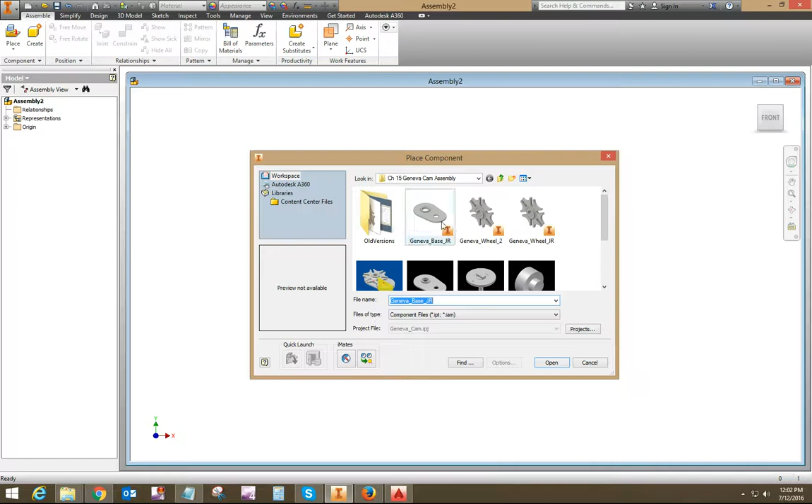Okay, now we're going to work on the Geneva Cam Assembly. So we're going to start a new English standard assembly file. And we want to bring in our base. And place it. And you definitely want to place grounded at origin. It did two of them again to me.

Anyway, okay, so when you created this from the AutoCAD drawing, if you did it on the XY axis plane so that you're looking like this now, you need to go back and edit that sketch to redefine it to get it so that it lays flat so that that is your top view, or else your assembly is going to be all wonky. Okay, so this is what we need to have.

I need to check that. I may not have made that tall enough. It just looks kind of short. Yeah, I'm going to fix that right here, and I will edit the note. I did it 0.625 from the bottom.

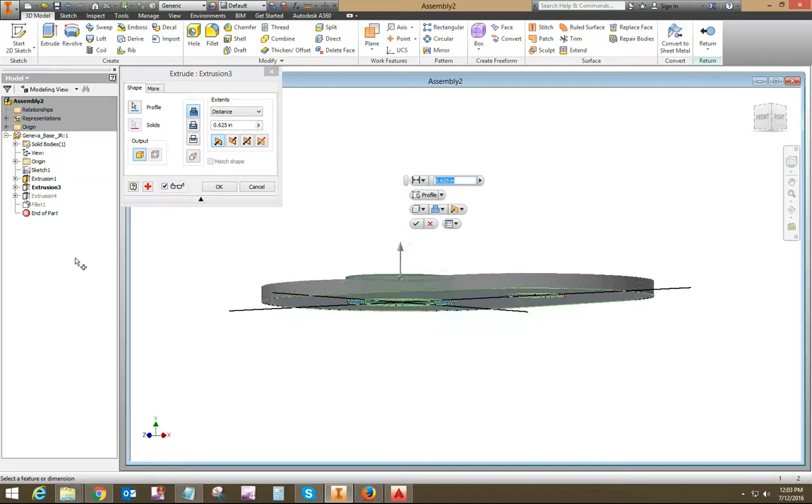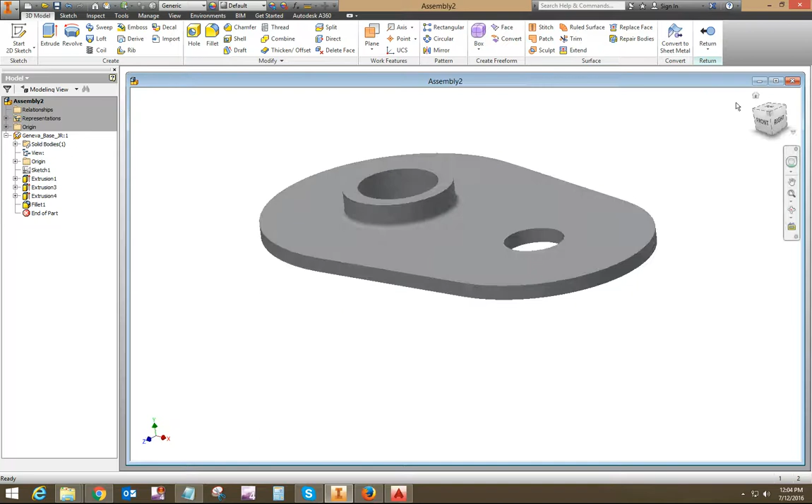So that should be 1 inch tall. Okay, that's how it should look. I'll edit the AutoCAD note, so you may or may not see that. Okay, so that's how it should look right there. Okay, so we got that first part in. Return. It's grounded. Now I want to bring in the actual Geneva Cam, or the wheel, and I'm going to drop it right here.

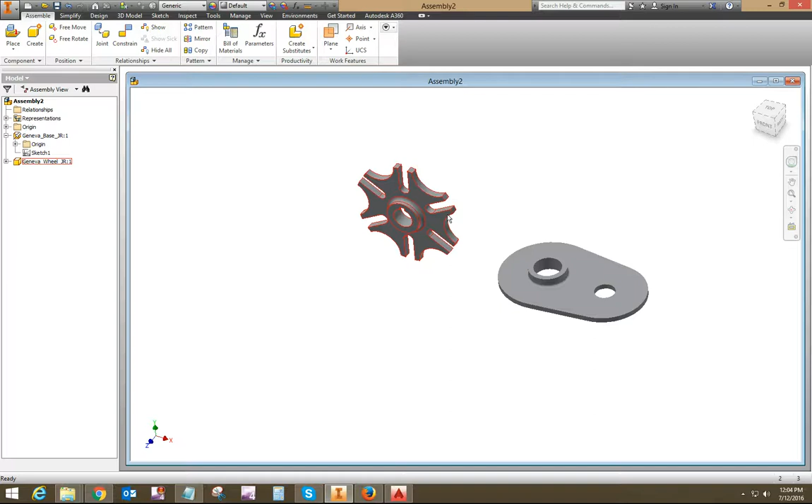Okay. Now to put these two together, we're going to use a joint. I don't know if you've done this yet or not, but we're going to use a joint command. And so if you want, hover over it, press F1 to read more about joints. But it's a way of assembling things with multiple constraints at one time. So if you hit here, you're going to see your different choices. If you know what you're doing, then you can choose the one that you want. But we're going to start with automatic.

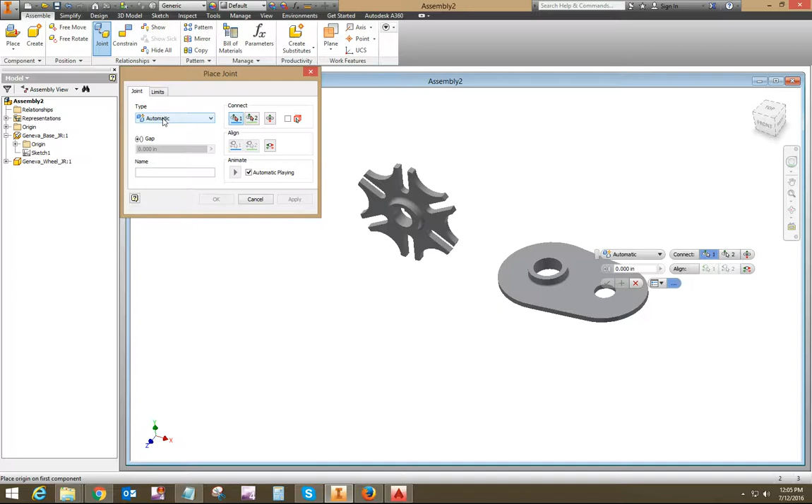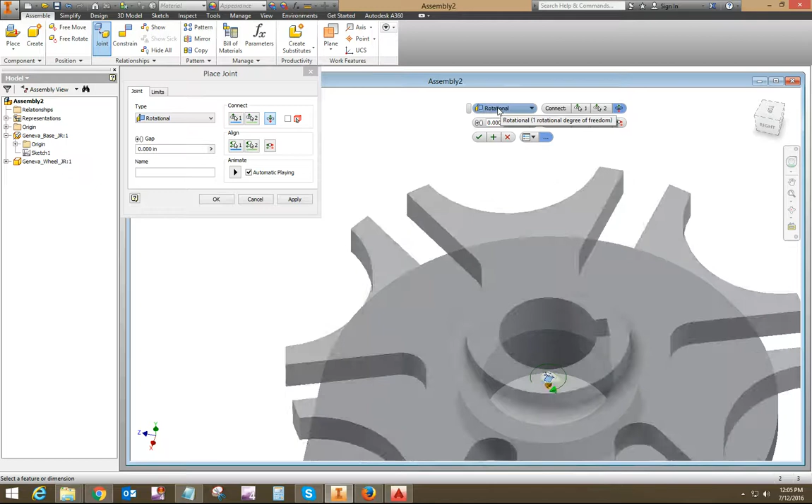Okay, and I want to kind of zoom around. I want to get to the back side of my wheel and choose that arc. Okay, and now I want to go to my base, and on the top surface choose that arc. Okay, and so it tells me it's going to use a rotational constraint. And you need to kind of look at it. If it's flipped up or down or something like that, then you can change directions here. Okay, but it should be okay if you chose those surfaces. And so we'll say okay.

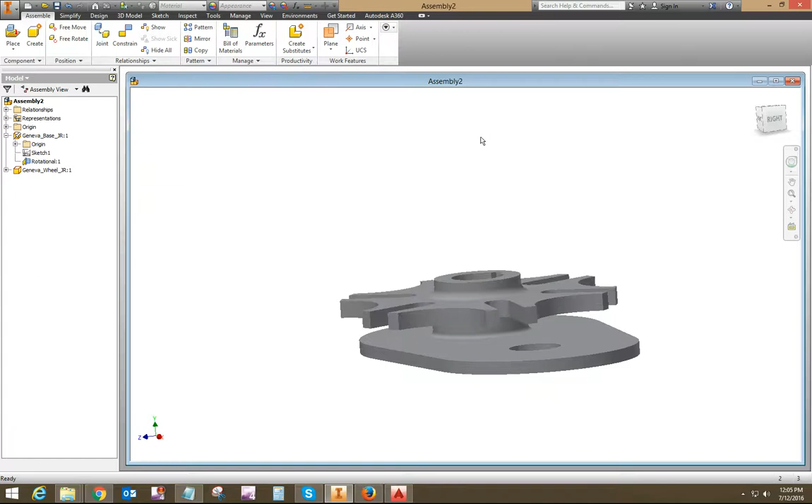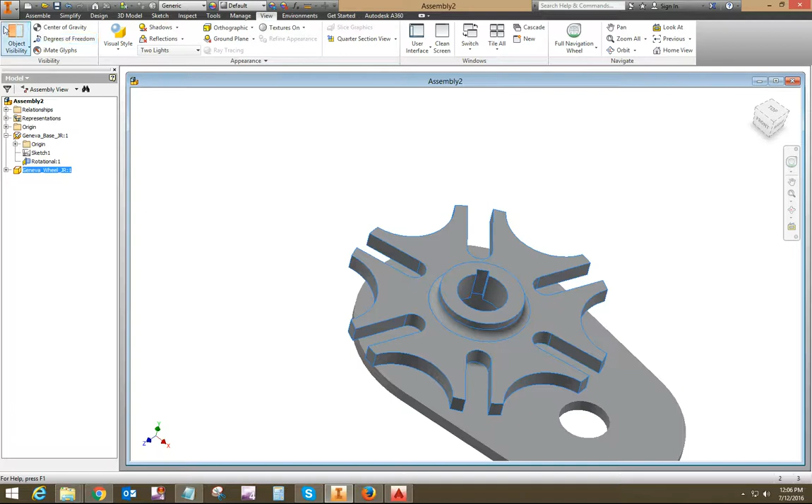All right, and so now it's there. I can wheel it around if we want. Let's check our degrees of freedom, and it shows me rotational is all that it has. Okay, now we want to bring in the driver. And I'm going to drop it right there. And I'm going to do the same thing, a rotational joint into this hole.

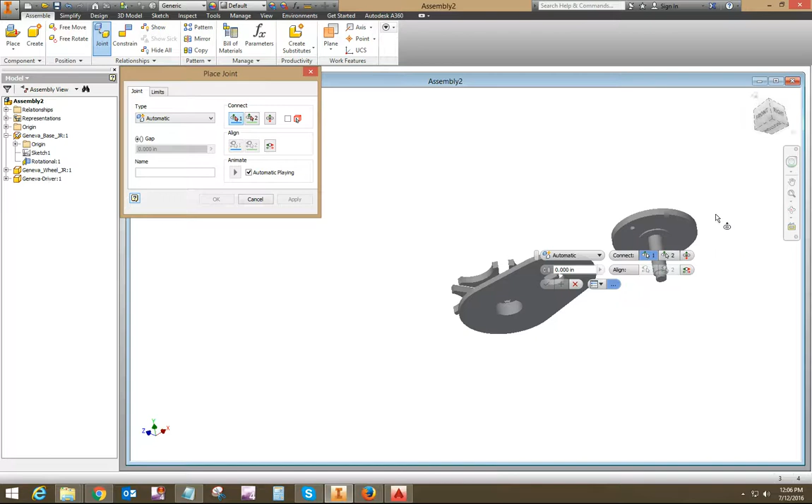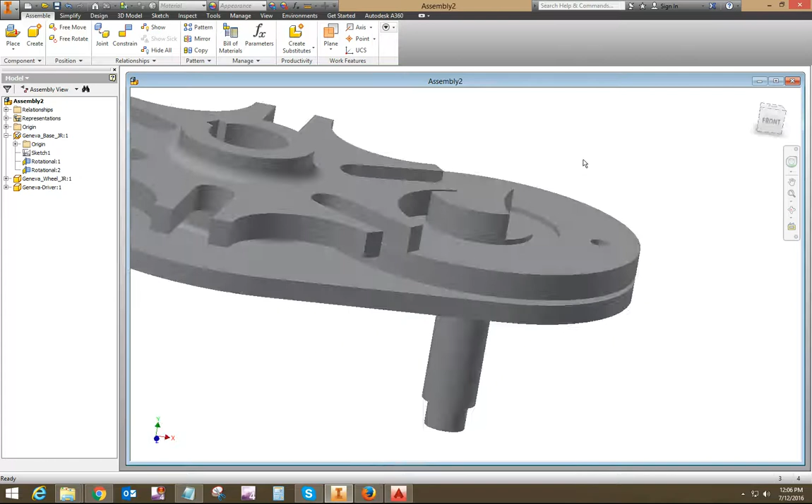Okay, so I'm going to go joint, automatic. I'm going to choose that circle and that circle. Rotational. Come back here and look at it. Looks good. It's not recessed down. It's not sitting down inside there, so that's good. All right, and now I can spin that around. Okay. All right, so don't worry, we're going to get to fixing all of this stuff, okay?

Now we want to put in the pin. Checking my notes, just a minute. All right, so let's bring the pin. Going to drop it right here. And we're going to insert it in the hole, but we're going to use a rigid joint because we don't want it to rotate and spin and such as that. Okay.

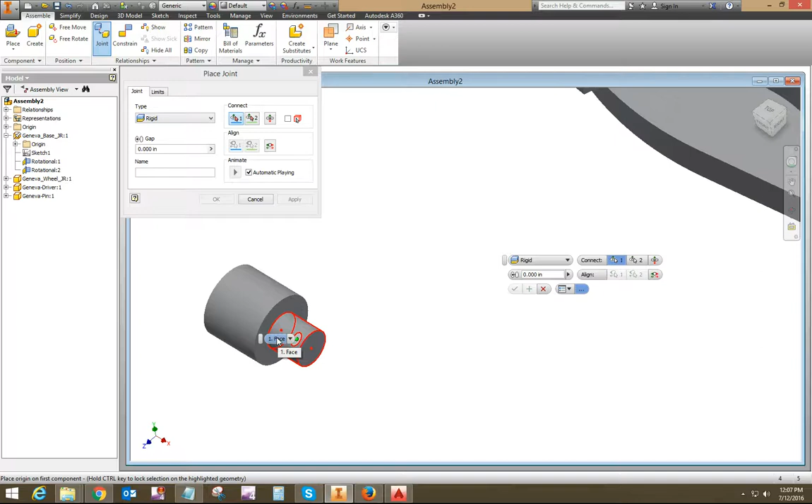So let's come down. Let's try it with the cylinder and the hole. That's kind of backwards. So let's flip that. That looks better. Okay. We don't need a gap in it.

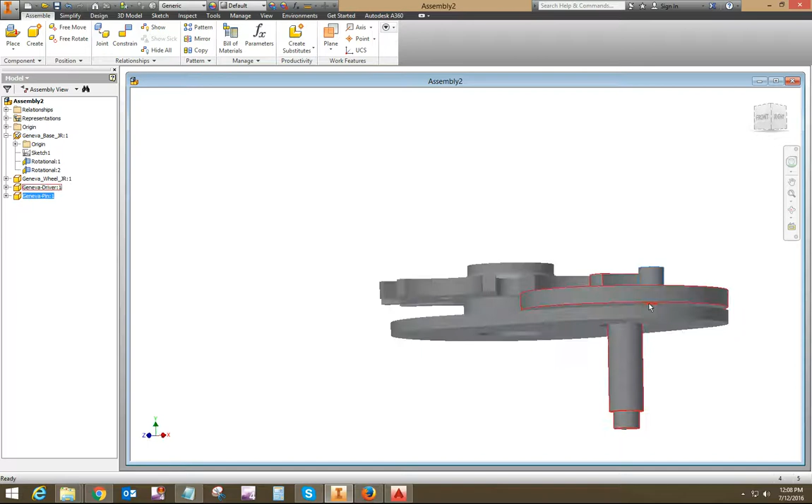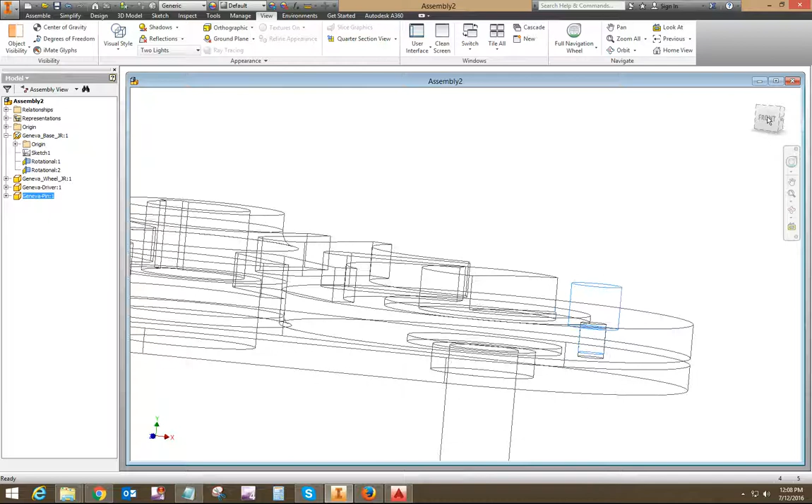I'm guessing that looks okay. So let's take a look at our degrees of freedom for that. We got a little block, so that's rigid. It's not going anywhere. Let's check our wireframe view. It is down too low though. We see that, so we've got to edit that.

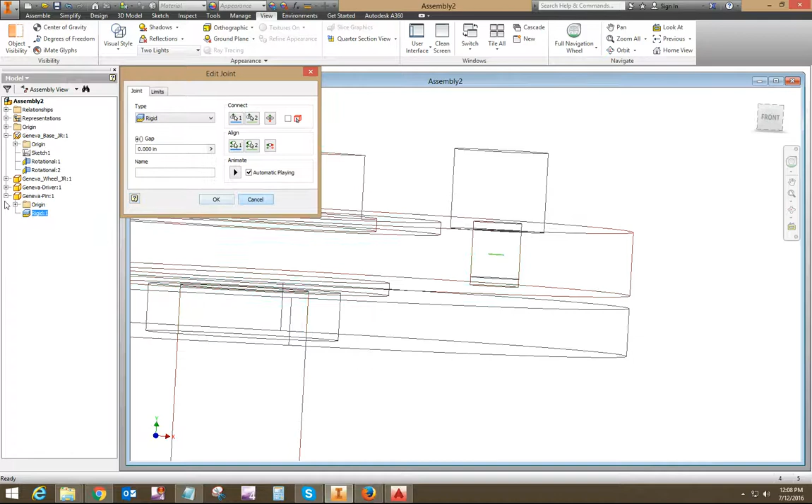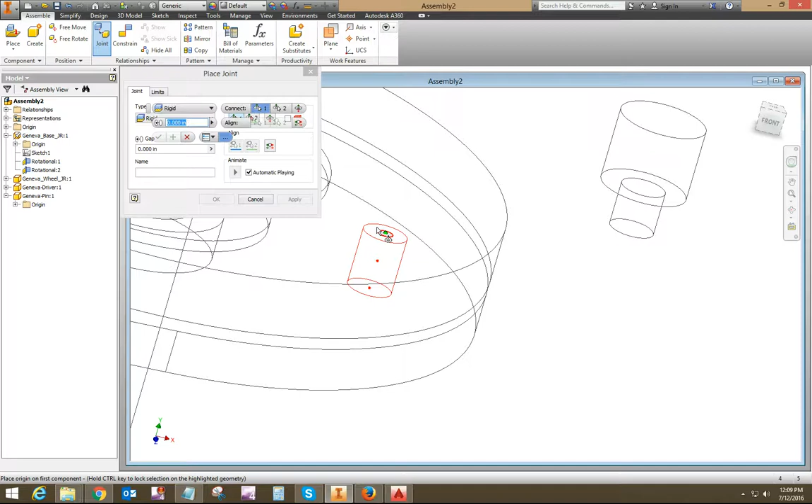So let's come here and, oh, I know what it did. It chose the center points of the holes when it did that. So let's just delete it so we can pull it up. Over here to the side. Now let's go back again. And let's go with the center point face of that circle. And that one. That looks much better. Okay.

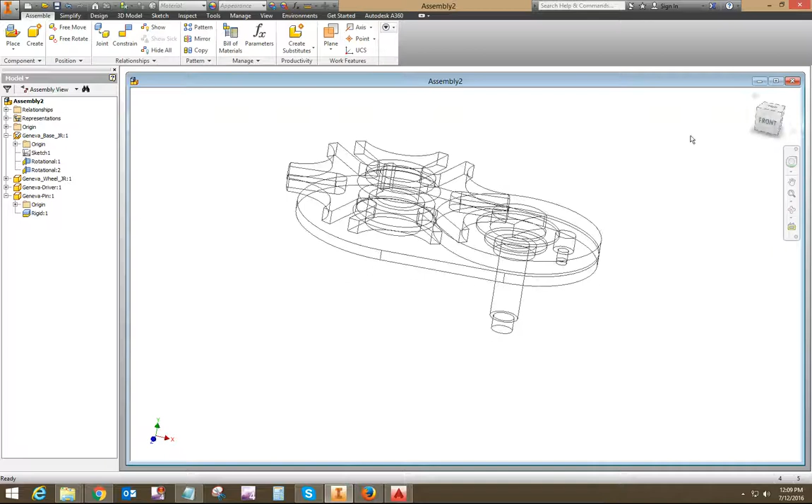Since we're here, let's check everything else. Okay, I'm not seeing any interference with things. So I can go back to my shaded view. Okay, so that's got all our parts assembled, and these things can spin and they just kind of roll through each other there. So what we want to do is kind of reposition the things so that they're kind of close to matching up.

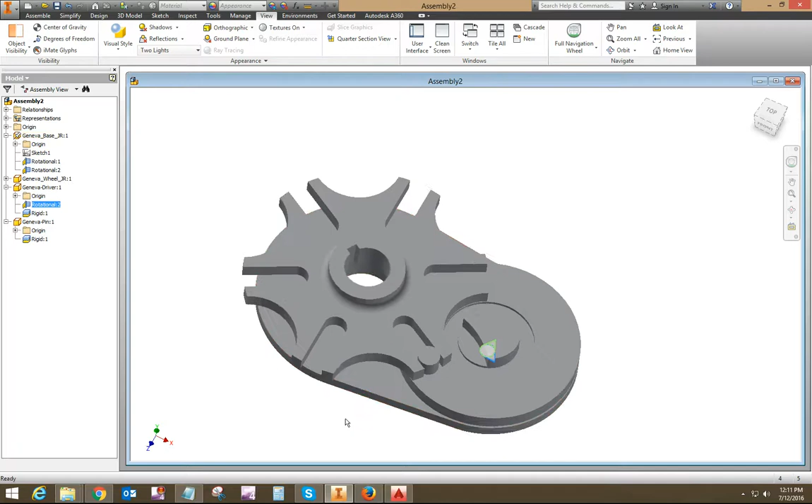Okay, so we kind of rotated those things around a little bit. Let's come over here in our browser tree and expand the driver so that you've got the rotational constraint. And let's right click and let's go to drive. All right, and you're going to have some based on where you've got it pulled to. And so it kind of moves back and forth. That's kind of what we want it to do.

Just for jollies, let's turn this on. Boom. Of course it collides. We know it does. Okay. I mean, that's obvious, but it is a tool there that you can use. All right, so we know we've got that kind of working right. Okay, had to check my notes there for a minute.

All right, so we're going to use a tool called the contact solver to make this thing work and move around. So on the inspect tab, we want to come over here and click on the activate contact solver. We want to click that button so it's highlighted. And then we want to come over here in our browser tree and on the wheel, right click the wheel and choose contact set. And notice it had this little icon right here. And we want to do the same thing to the pin. So it's got the little icon there.

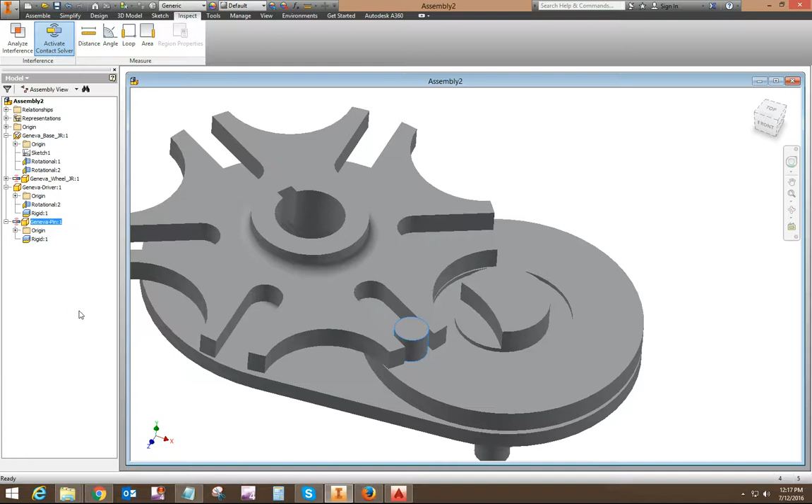And now we'll go back to the driver, the rotational constraint, and we're going to drive it. All right, so let's just punch it and watch. Oh, see, it moved. That was cool. All right, so now let's change this to 0 degrees and 360, and let's play that. And you can see it moved around. We can turn that off. We don't need that anymore. So let's run it.

Oh, that's looking good. Now let's say 5 rotations. So that's looking kind of good there, isn't it? Okay. I'm going to stop that. Pause it. We can play with it with our speed here a little bit. Speed things up a little bit. That's looking a little better.

Okay. And so now, after you've got all this done and working, you're going to record a video of the 5 rotations. You can do it at 2 speed or 3 and see how 3 looks. That'll make for a quicker video. It may be a little choppy. We'll see how that goes. Okay, but you're gonna record a video here of the contact solver and this whole thing moving. Okay, and just for jollies, as long as this contact set right here is turned on, you can move that stuff around. Okay. All right, and so that is that.